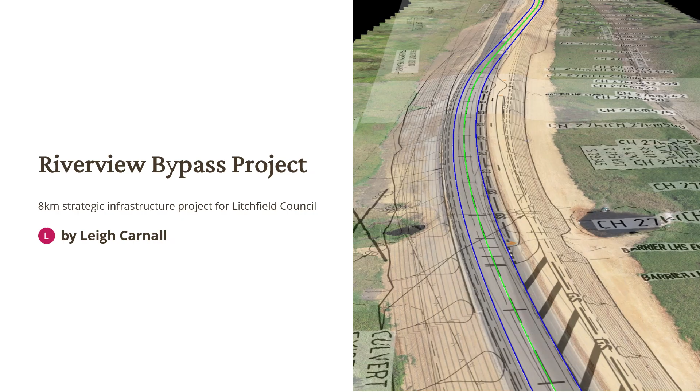Hey, my name's Leigh Carnall, and this is the Assignment 3 Pavement Construction Report regarding the Riverview Bypass Project.

Okay, so the project overview. The purpose of the project is to enhance freight efficiency, bypassing the town of Riverview. It's an 8 kilometre bypass. The biggest vehicle is predominantly B doubles.

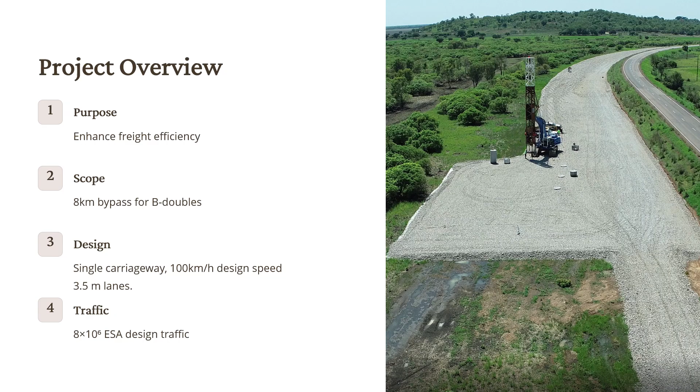Design aspects are it's a single carriageway, 100 km/h design speed, one 3.5 metre lane in each direction, so 2 lanes all up, and a metre wide shoulders either side. Traffic design is 8 by 10 to the 6 design traffic.

So the location and alignment, we've got on the north side a floodplain area. 3 kilometres of the road goes through that floodplain area. On the south side, we've got about another 5 kilometres, and that's above the floodplain, but through predominantly sandy soils. We're going to talk a little bit about those sections.

Through the middle of the job, we have at the 3 kilometre mark a culvert for the Black River crossing. So we've got to work out some aspects with the culvert, as well as the town of Riverview adjacent the project site. Either side of the road we have landholders growing sensitive crops, so we need to make sure that we mitigate dust in particular, but also they can't have contamination in their crops.

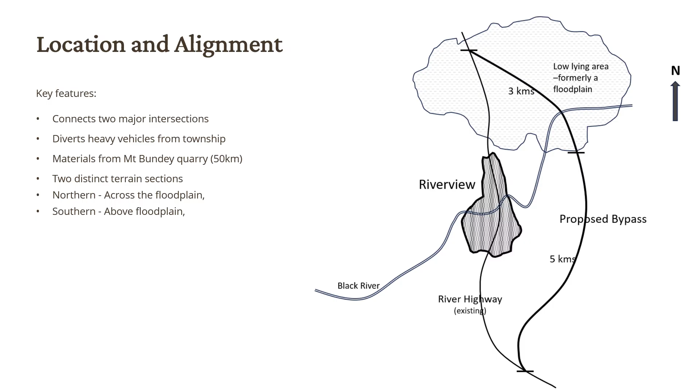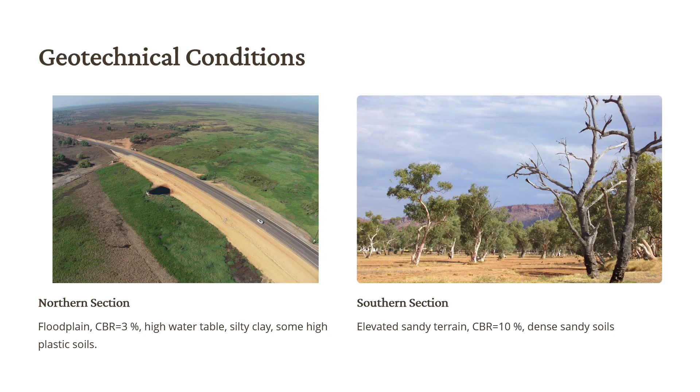So geotechnical conditions, like I said, the northern section is through a floodplain. It's got a high water table, predominantly silty clay, some highly plastic soils. CBRs are around about the 3 mark expectation. It could well be even less in areas, given the NT. Southern section is elevated sandy terrain, CBR about 10, typically dense sandy soils, pretty good for constructing on really.

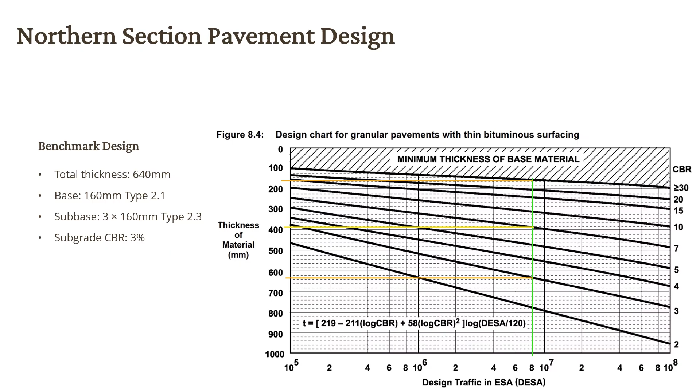Northern section pavement design, as a benchmark design, it comes in at 640 millimetres in thickness, chosen about 160 mil of type 2.1 and 3 160 mil layers of type 2.3. This is based on a CBR of 3%. We can significantly de-risk the project by treating that subgrade.

What happens there is that working across a clay subgrade in the NT is fraught with prolongation and delays as a result of any water or a late wet season downpour, a bit like what we've got this year in parts around northern Australia. That water on the floodplain in clay soils will delay the contractor from starting works. Delaying starting works has a risk that you're unable to get the seal down before Christmas.

If you want to seal any time after Christmas, you really aren't doing that in Northern Australia until Anzac Day. It is just absolutely fraught with risk. You'd have to be very highly pushed and motivated to get the seal down any time between Christmas and Anzac Day. And that poses quality risk. So there are some very good reasons for going for a subgrade treatment. We're going to look at a couple of them.

So we'll go have a look at geotextile. Geotextile still requires a cover over the top. The downside is you can push that material out and then you're going to have to put some kind of imported fill over the top. Typically a graded material, can't be too large or you risk puncturing that geotextile, but a geotextile can still work in very soft conditions. But again, you still have to get construction traffic over, create a tip head and move off the job that way. So in soft conditions, it can still be fraught with that.

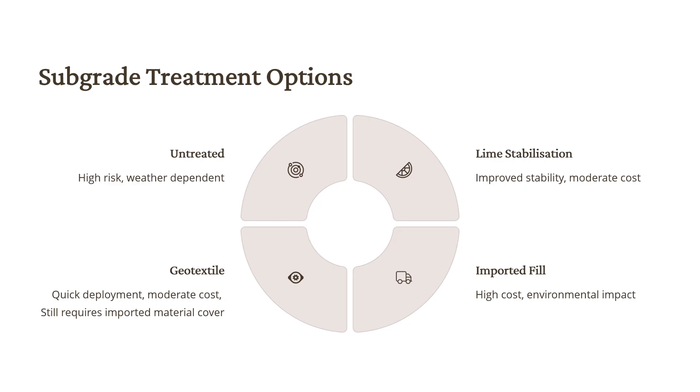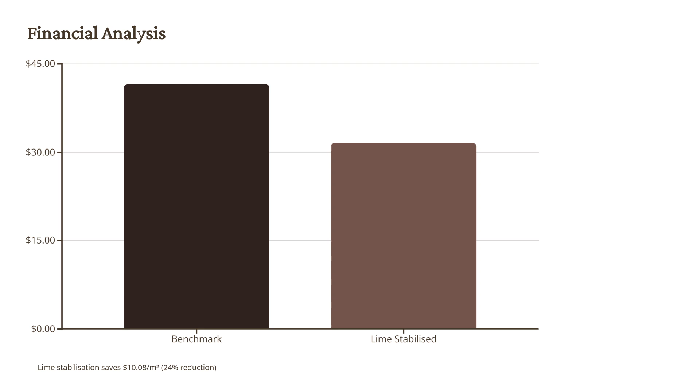Financial analysis. So we've done some of that, and it's come in at $10 a square metre reduction over the benchmark, which is the 600mm pavement versus a 400mm pavement. That's an analysis. So we've got this lime stabilisation approach.

So the layer design we've gone with is a 200mm stabilised layer. Now this layer has been chosen to make sure that we don't... we could have gone thicker. That would have needed to have been built in 2 layers. So then you would be targeting maybe 300 to 400 mils, which then means that you've got to remove some material and bring it back when you're doing the second layer. Didn't really want to do that, just do it in 1 layer.

200 mil is about the thickest there that you can compact with a lime stabilised clay. So you really want to be targeting that thick layer to get the most out of the work that you're going to do. Now, the process of lime stabilisation revolves around trimming up the subgrade to levels, getting it about there, giving it some nominal compaction so you can still work on it, spreading about half the lime.

We're going to use hydrated lime, so that means it does not need to be slaked. The reason for that is when you slake it creates dust and fizzles, and that produces a hazard to not only the guys on site but also the crops adjacent the alignment. So we don't want to be contaminating those crops with this lime. This was a key factor there that the landholders have said they don't want to happen. So we can mitigate that by using hydrated lime.

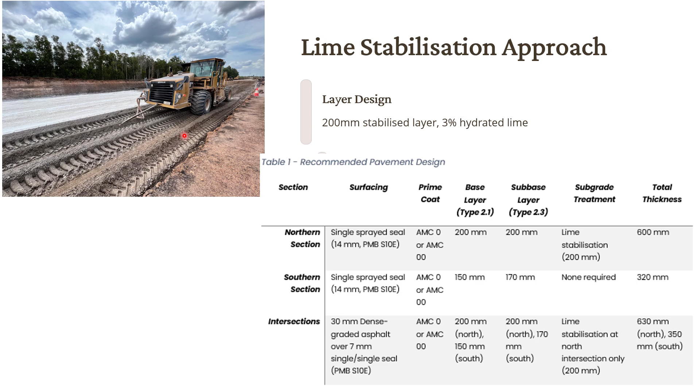Now, some quality aspects there that need to be taken is we should be seeing the mixing supervisor going along the back of the mixer, ensuring that the materials are adequately mixed, that the depth has been achieved of at least 200 mil, and that the moisture content is right. So doing the squeeze test.

So as a demonstration of this, we're going to do a tale of two subgrades. Two similar floodplain projects started simultaneously. This is a typical floodplain. Water's been on the alignment. So project one had no lime stabilisation. It was focused on initial cost savings.

Unseasonal rains in May caused machinery to bog, and that significantly delayed the job, caused frustration for the contractor and the project team, and ultimately the community was frustrated as well. Now the further downside was they lost a month with that work, trying to get back onto the clay, being bogged, all those kinds of aspects, which meant that where they were going to seal in November, December, it got delayed.

A monsoon burst came through. They couldn't seal the job, and they had to then seal at the back end in April. So starting the project in the NT on a floodplain without lime stabilising is really risky at the back end of the job, trying to get it sealed before those monsoonal bursts come. Project 2, on the other hand, used lime stabilisation.

The contractor knew what they were doing. As soon as they were clearing and grubbing, they got on and lime stabilised it, created themselves a nice working platform. From there, the job just proceeded one after the other. They continued on. They got the rain that the first project had as well. Just like on this project here, there was water sitting there everywhere.

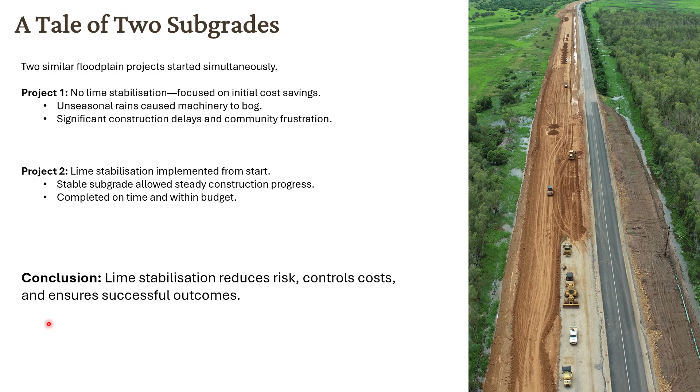Okay, so the southern section pavement design, we've got a total thickness there of 320 millimetres, consisting of 150 mil of base and 170 mil of sub-base. Subgrade CBR here is 10. Now, remembering it's on a dense sandy soil, so there's not really too much risk there. About the only thing would be any soft areas, which we can pick up during construction. The trucks will certainly find that. DCP should be used to confirm that subgrade CBR on those sandy materials.

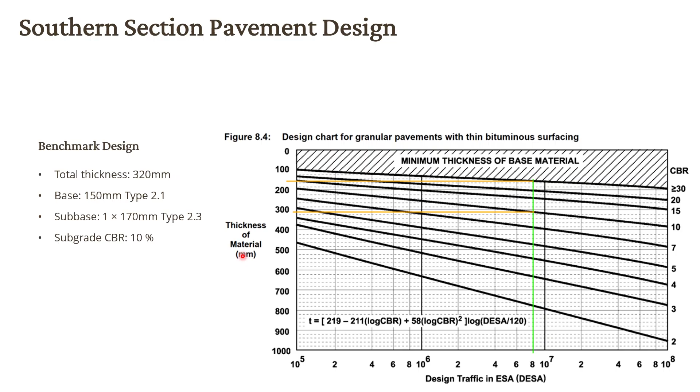Okay, so the intersections. The intersections you see there are aligned with what they're going to do. Now there are some aspects there with construction we can mitigate, and the pavement as well. So in a perfect world, we would do a construction bypass of this area on the western side for both of these. Now we may not be able to do that because of fencing or services that need to be relocated, for instance, as well as cost.

Now there's an aspect here that probably needs to be addressed in terms of whether this intersection here, this deceleration lane, needs to go in through here. So the geometric designers need to have a look at those aspects and whether an acceleration lane needs to go in here. Now, those particular aspects add up to increase the pavement area, but this could be supplemented through reducing the detour on the western side, removing that, and building the pavement in half and half.

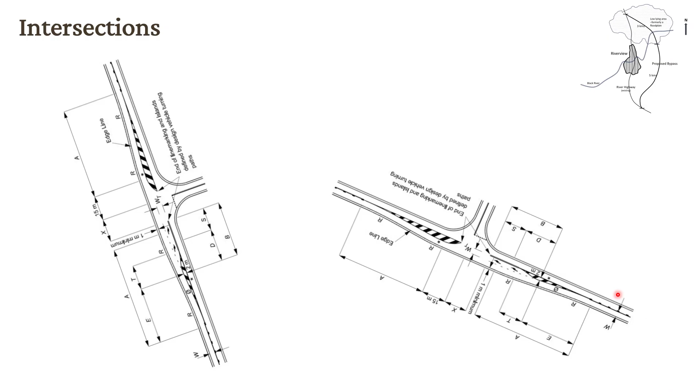So what I mean by that is building this side of the pavement here, and then putting traffic on this side of the road and building out this side, and then coming back and building this bit later. So doing that half and half, not having to put in this detour around here, depending on the ground conditions there for that bypass.

Okay, so the spray seal, we are going to go with a 14mm PMB S10E on a primed surface. This is different to the NT standard specifications in that typically there would be a double PMB surface being called for. We still recommend that the double 14/7 PMB S10E goes down. So that is something that we believe should be done. At the very least, if a single seal is what the client is going to go for, then that should be a PMB S10E.

The intersections call for a 30mm DG asphalt. We're opting to put in a 7mm single sprayed seal. Again, an S10E, a PMB S10E. The reason for that is to improve the waterproofness of that pavement. All up, the spray seal and asphalt areas come to about 94,000 square metres, so it's a decent sized job.

The works plan is having the intersections sealed first. They'll be constructed first and sealed. The 7mm seal will act as a surface to travel on until such time as at the end of the job, bringing in the asphalt crew to do both intersections at once.

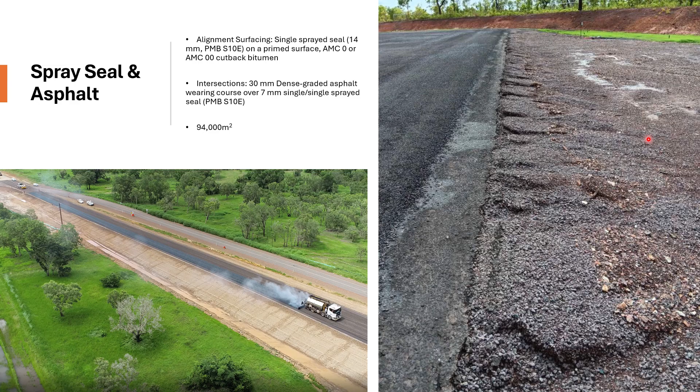So here's our list of plant and equipment here. Not too much dissimilar from what we would typically have on a road job. Some aspects there to consider is that getting asphalt out here may be a problem. There was a supplier in town. If not, then we can still do a spray seal solution for that surfacing in lieu of the DG asphalt. That would entail a double seal 14/7 and a sand lockdown treatment.

The other aspect is the stabilisation spreader and the stabiliser, having a decent size stabiliser to ensure that the contractor can mix adequately. The full depth clay can get pretty tough on the stabilisers, pretty dense, and a big pad foot roller, an over 20 tonne kind of roller, just to compact that lime stabilisation down adequately.

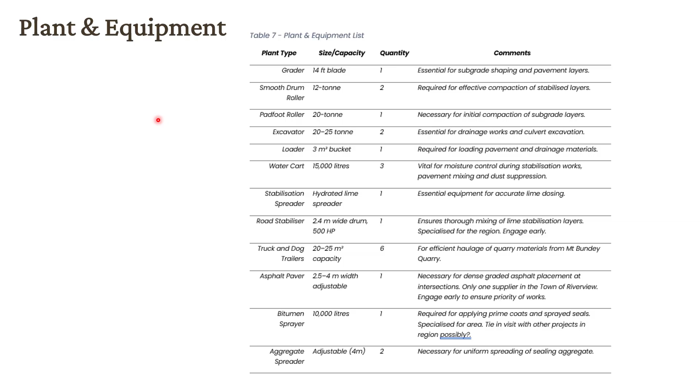All right, so material quantities, we have 33,000 odd cubic metres worth of material going in. So 85,000 tonne or thereabouts, about 3,000 truck movements all up. So a key part of this is building the intersections first, keeping the trucks away from going through Riverview, getting them down the alignment, building from the northern side, building that lime stabilisation.

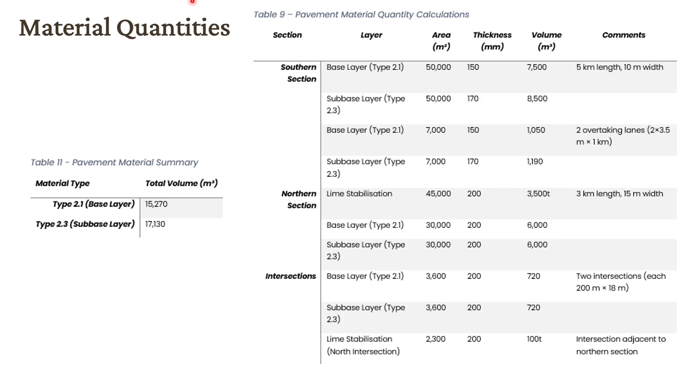The trucks run on that. They run on the sub base over the top of the culvert, and finally building the southern side. So with truck traffic on the alignment, keeping that water up to ensure that dust is not impacting on the community.

All right, so the construction schedule we've got starting in February, using that early period to mobilise the site, do those preliminaries, do some clearing and grubbing. As soon as it's dry enough, working on that lime stabilisation, starting at the culvert, whacking in the temporary culvert, the low flow culvert here, doing the embankment construction over the top of that culvert so we can move trucks from the northern side to the southern side.

Lime stabilisation, in addition, once that's finished on the northern intersection, going on and building the northern and southern intersections to facilitate those pavement materials coming in through that period of time. We've also got pavement construction happening on the north side and then proceeding on the south side. Finally, at month 8, which should be about October, November, we should be starting to see spray seal, asphalt, and finally pavement markings and road furniture going down.